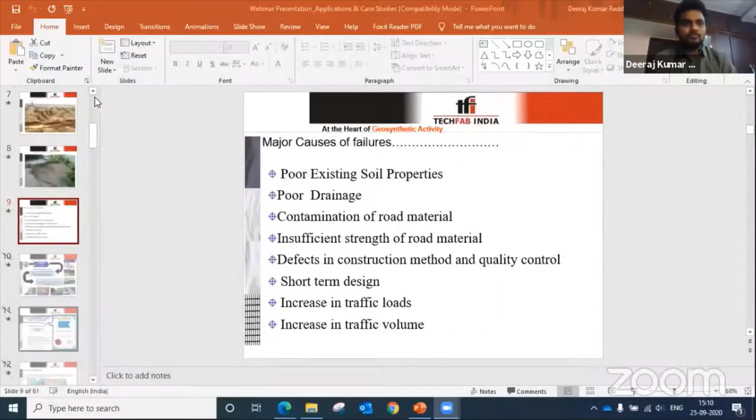Thank you for your kind words. Good evening. Go ahead. Sir, you need to enable screen sharing for me. Yeah, perfect. So you're able to see my screen, sir? Yes, yes.

Good afternoon all, myself Deeraj Kumar Reddy. I feel privileged to be one of the resource persons speaking in front of you all, being one of the alumni of Vidyanikethan Engineering College. Today the presentation I'll be speaking on is applications and case studies of geosynthetic materials in road pavements.

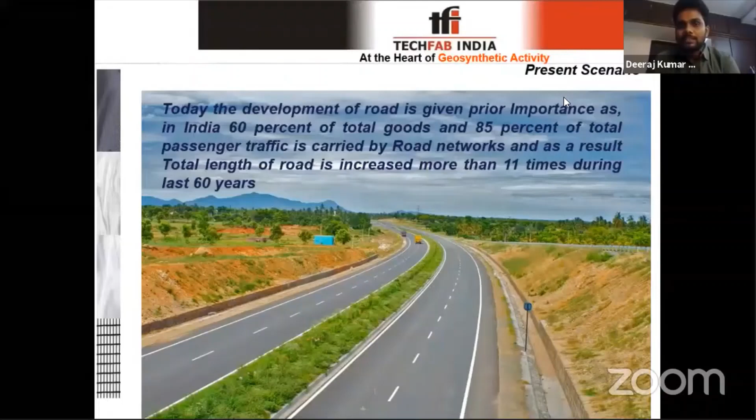As you are aware, the development of roads is given prior importance in India. In India, 60% of total goods and 85% of total passenger traffic is carried by road networks. As a result, over the last 60 years, the road network has increased by 11 times. I am very happy to present you very good roads in India, including rural roads, which have been of prime importance over the past few years.

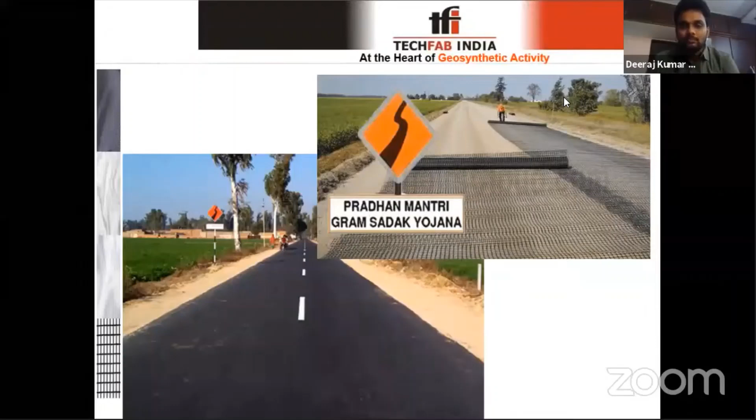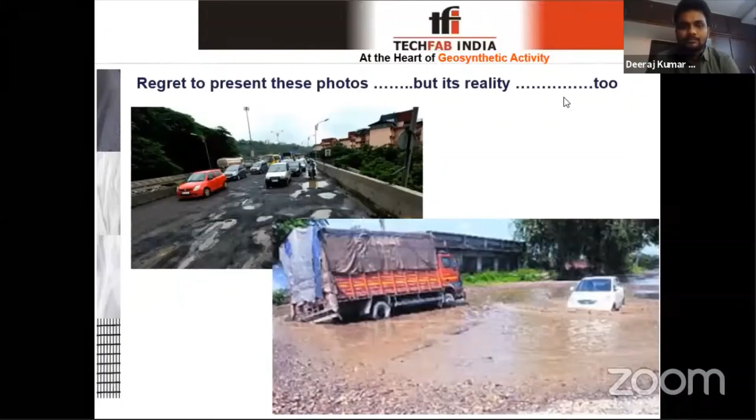But at the same time, we should accept some harsh reality where, due to various reasons, the situation of roads in India are like this - due to poor drainage systems, slope failures, or erosion failures.

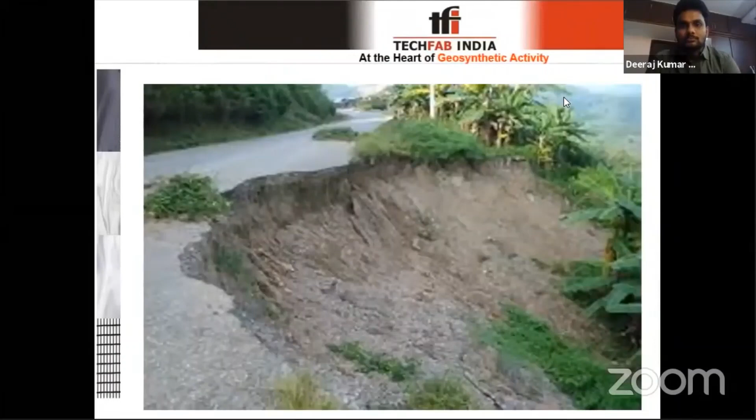When we talk about the major causes of these failures, starting from the poor existing soil properties - because we cannot eliminate the use of poor grounds from constructing the road network - and the poor drainage, that is, when we plan the construction of a road pavement, we often do not plan the drainage system, which is of prime importance, and poor drainage will cause the failure of the total structure. Then there's contamination of road material, insufficient strength of the granular materials used in road pavements - which can lead to failure - and defects in construction method and quality control.

Even if you design with 100% accuracy and perfection, if someone at the site doesn't implement what you have designed correctly, that leads to failure of your design structure.

Then there is short-term design, where there's an increase in traffic loads or traffic volume. At the design stage, you design the road pavement for 15 to 20 years. If the traffic you intended for 15 to 20 years is reached within 5 years, then it becomes a short-term design. That is also one more reason why road pavements fail.

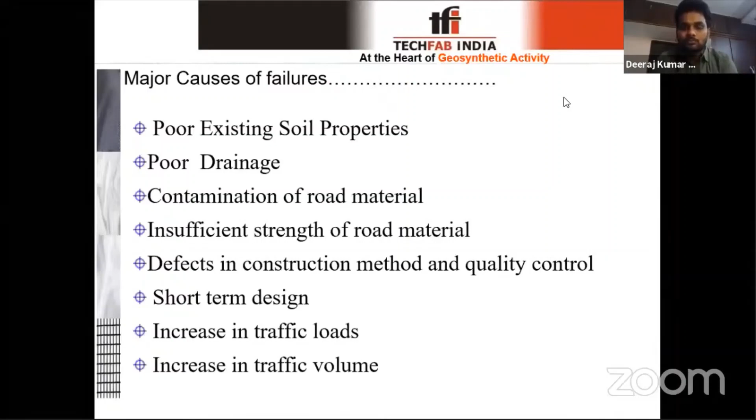So now we have discussed various causes of road failures. To address these causes, in today's presentation we will see the functions of various geosynthetic materials used in road pavements, the applications of geosynthetics in road pavements, and for each application I'll discuss the design and codal provisions, since there are certain codes and guidelines in India available for each application of geosynthetics.

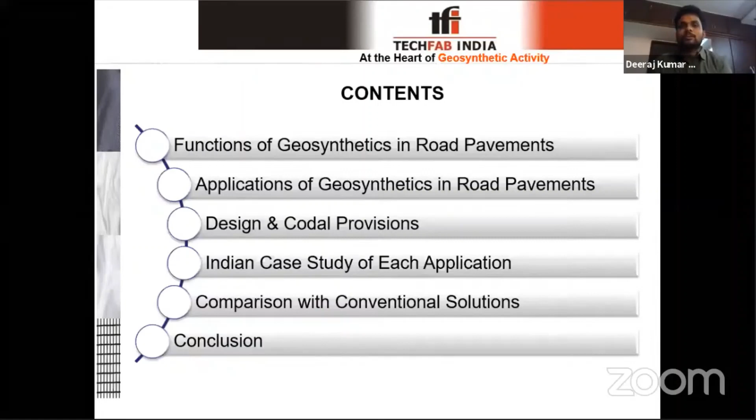Earlier this was not the case, because 5 or 6 years ago the availability of standards and guidelines in India for geosynthetic applications was very limited. But now they have emerged rapidly and usage has also grown a lot. For each application, I'll show you a case study of how it is implemented at site, and then we will compare it with conventional solutions, since geosynthetics are implemented as an alternative to conventional solutions.

Starting with the functions of geosynthetics, this is how we can avoid the failures we just discussed. First is the separation function. Then drainage, which is collecting precipitated water and discharging it to safer places. Then filtration, which means allowing water to pass through different layers while not allowing soil to pass through, preventing the mixing of two soils while allowing water to dissipate. Then reinforcement, which is generally strengthening a particular layer or material. And the barrier function, which arrests the capillary rise of water.

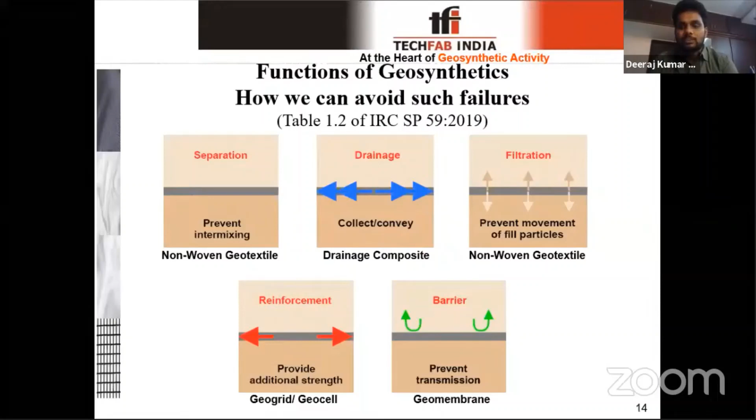With these functions, we have different applications of geosynthetics that we will see one by one. These applications are cost-effective solutions, with codal provisions, used as an alternative to conventional solutions, starting from subgrade separation and stabilization.

If you are aware of the pavement structure, there is the subgrade, which we call the existing ground. On top of the subgrade we have GSB, the granular subbase, made up of granular material. Then we have the base layer, the wet mix macadam, and then the bituminous layers - this is in case of flexible pavement. In case of rigid pavement, there is an existing ground, and on top of that a granular subbase which acts as a filter or drainage layer, and then on top of that a concrete slab. In all these layers or parts of the pavement, we have different applications of geosynthetics.

Starting from the bottom: subgrade stabilization or separation, then ground improvement for road embankments, because when a road embankment passes through very poor soil, you need to improve that ground to make it suitable for road construction. Then subsurface drainage, drainage within the pavement structures, because when rainfall happens and water infiltrates the pavement structure, it needs to be discharged to safer places. Otherwise the infiltrated water stays within the pavement structure and destroys it.

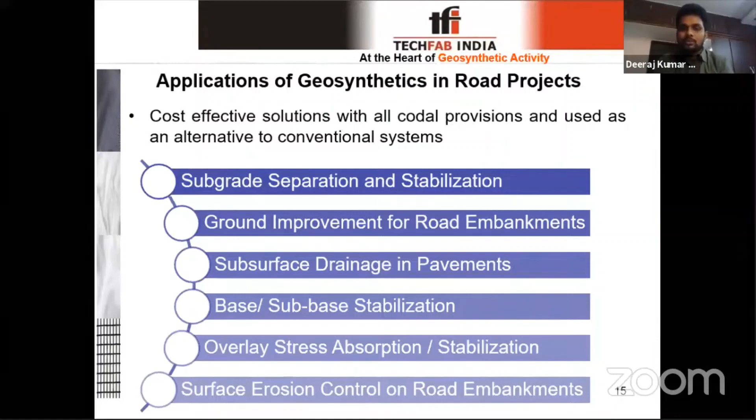Before going to the applications, I would like to focus on the standards and guidelines available for geosynthetic applications.

First, the Ministry of Road Transport and Highways specification, section 700, which exclusively deals with the specification of geosynthetics for various applications in road construction. Then there is IRC 37, the guidelines for the design of flexible pavements in India. And IRC SP 59, the guidelines for use of geosynthetics in road pavements and associated works - this code is exclusively for geosynthetics, covering design methodologies, applications, working mechanisms, installation methodologies, everything.

Then IRC SP 42, that is the guidelines for road drainage, and IRC 113, the guidelines for design and construction of geosynthetic reinforced embankments on soft subsoils. IRC 75 is the guidelines for high embankments. And IRC 34 is there, the recommendations for road construction in areas affected by waterlogging, flooding, and salt infestation.

Then IRC SP 116 is there, the guidelines for design and construction of gabion structures. My suggestion would be, if not for usage, at least for understanding the various applications, mechanisms, designs, and provisions of geosynthetics used for road construction. These guidelines are useful for both transportation engineering and geotechnical engineering prospects, and they are easier to understand than textbooks. So my suggestion would be to keep at least one copy with you, and whenever required, just go through them.

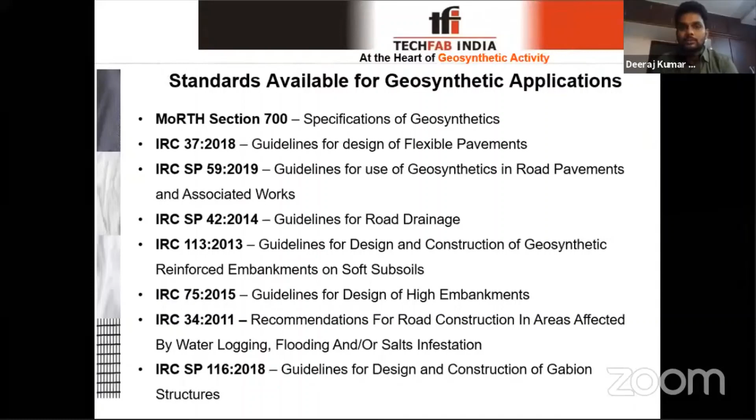Starting with the separation and filtration function. This is the application where, for example, you have a black cotton soil, and on top of it, if you intend to construct a road with good quality granular materials and other layers. Over a period of time, the good quality material on top of the black cotton soil will get mixed with these clayey particles, and it will deteriorate the strength of your good quality material also.

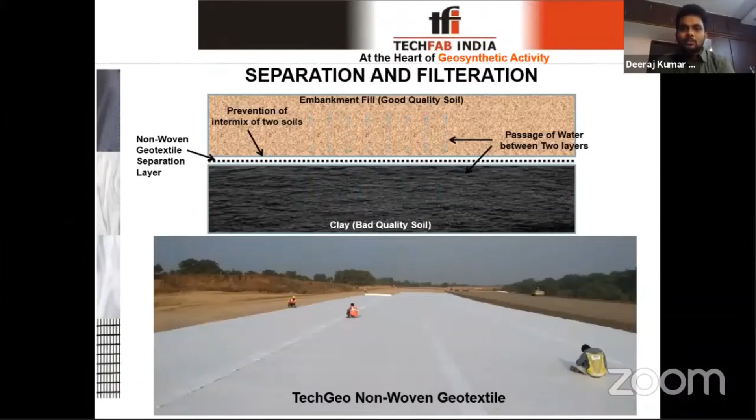So if we prevent intermixing of these two layers, each layer will function its purpose for the entire lifetime of the pavement. In order to separate these two layers, we have a non-woven geotextile which separates the two layers, and at the same time allows water to pass through, because if you arrest the water passage, it will develop pore water pressure and unnecessary problems will arise. So this geotextile will only restrict the passage of soil particles and allow the water to pass through. This is about separation and filtration.

When we talk about the non-woven geotextile application, the BIS code 16363, the Ministry of Road Transport specification, and IRC SP 59 cover the minimum requirements of geotextiles for use in road pavements as a separation or filtration layer. There are 3 conditions of installation, and based on our project situation, we can adopt what type of geotextile to use, because based on harsh, moderate, or less severe site conditions, we have different strength requirements of the geotextiles to be used.

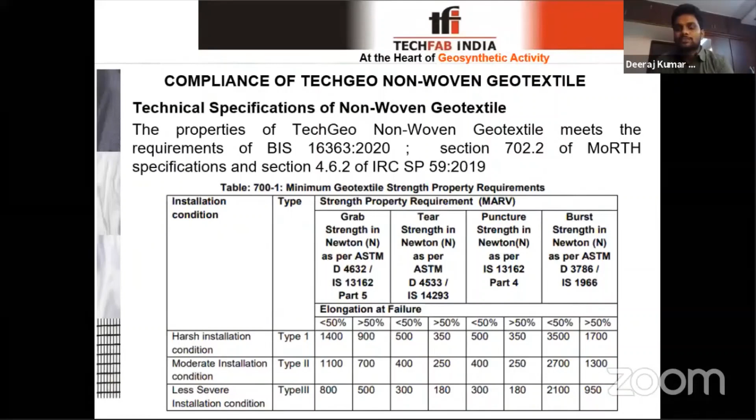Regarding the case study for the separation and filtration function, I'll show you one of the projects which is executed, or being executed, in Gujarat currently. That is the Vadodara Kim Expressway, executed by NHAI, with L&T as the contractor.

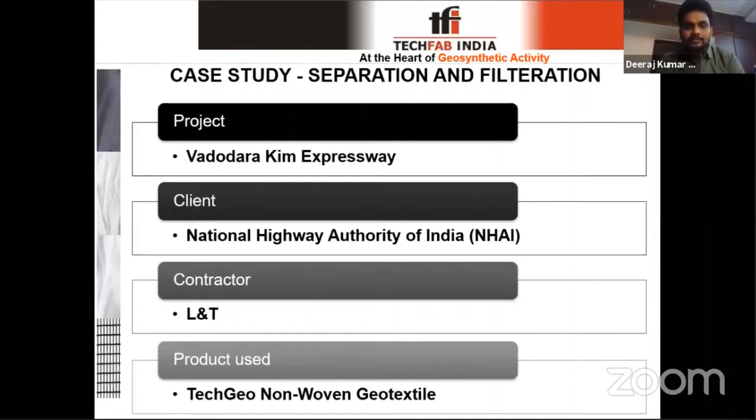The soft clay in the existing soil was the main problem here, and the possibility of intermixing with the granular layers above would deteriorate the strength of the granular layers. Hence, there was a need for a separation and filtration layer, and the non-woven geotextile, which meets the requirements of MORTH 700 specification for separation and filtration geotextile, was used in this particular project. You can see the condition of soil in the subgrade, where it is purely a black cotton soil, which is expansive and very weak in strength.

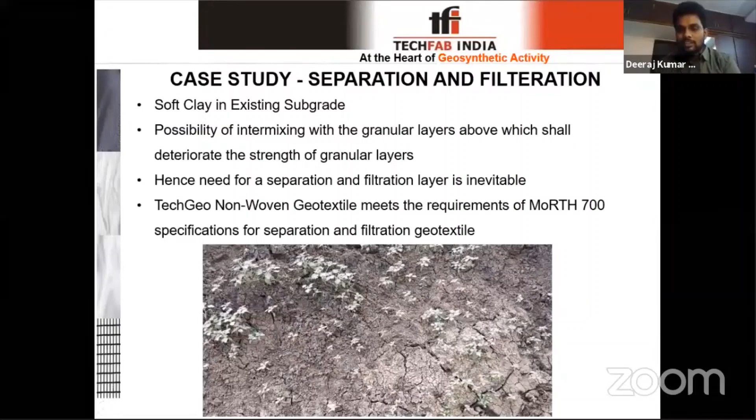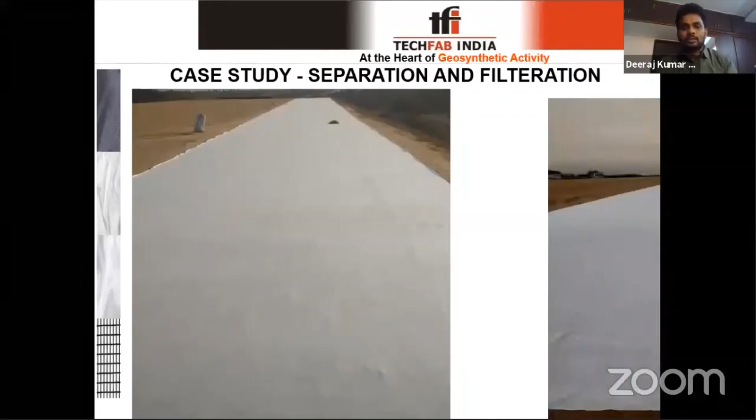So these are some of the project photographs. Basically these geotextiles come in the form of rolls, where each roll is around 5 meters wide and 100 meters long, and of course these can be customized based on requirement. These rolls are first unrolled as per our markings, and as your road pavement is wider than your geotextile, you need adjacent rolls, and these adjacent rolls need to be provided with an overlap of 100 to 150 mm.

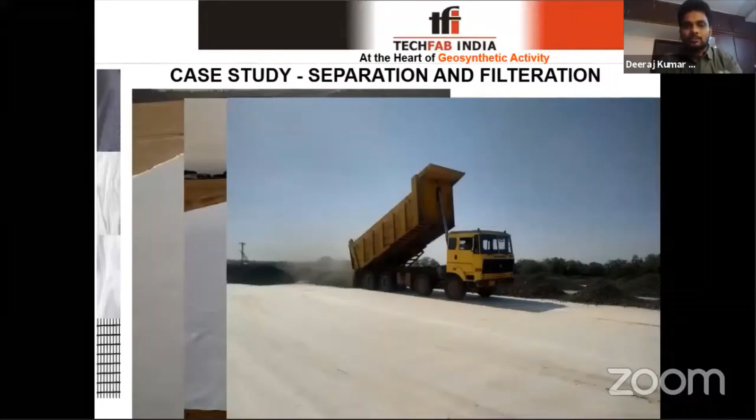Once these geotextiles are laid, the remaining granular layers like gravel, GSB, and other layers will be laid, and this geotextile will prevent the bottom soil from getting mixed with the granular material that is being laid on top of it.

So the next application is ground improvement involving geosynthetics. This ground improvement especially is required where you are constructing a road embankment, that is, making your road elevated from the existing ground.

There are various options like basal reinforcement, where you're reinforcing the bottom of the embankment with the geogrid or geocell, and subsurface drainage, where whatever infiltrated water from the top or the capillary rise of water needs to be discharged laterally using subsurface drainage, along with the separation geotextile we have seen just now. There are other applications also, like deep foundations with basal reinforcement with piles, and staged construction with PVDs and stone columns.

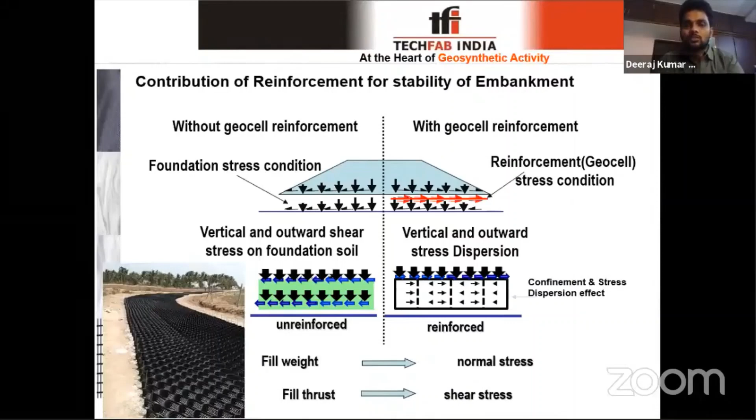Regarding the design of geosynthetic reinforced embankments, I've discussed the various codes: IRC 75, which is the guidelines for design of high embankments, and IRC 113, which is the design and construction of geosynthetic reinforced embankments. These are the guidelines. If you have at least basic fundamentals of geotechnical engineering, you can very easily understand the guidelines or standards given in these codes.

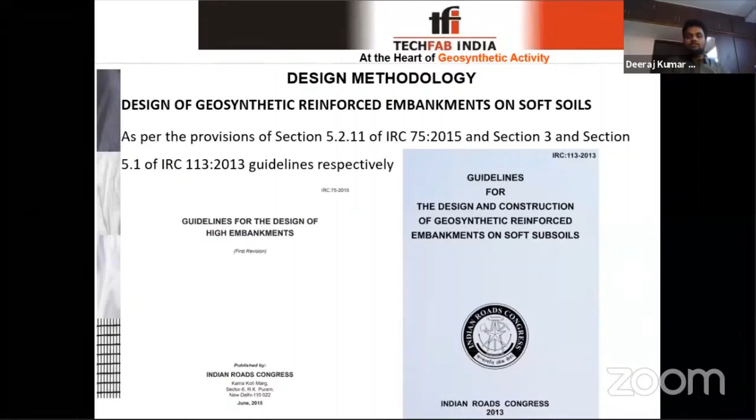Regarding the technical specification of the geocell, that is specified in the ministry's specification and IRC SP 59, which includes the density, environmental crack resistance, carbon black content, cell wall thickness, peel strength and creep rupture strength of the geocell.

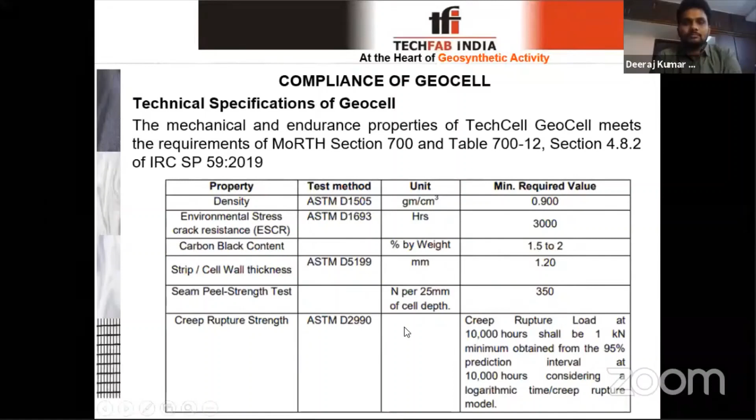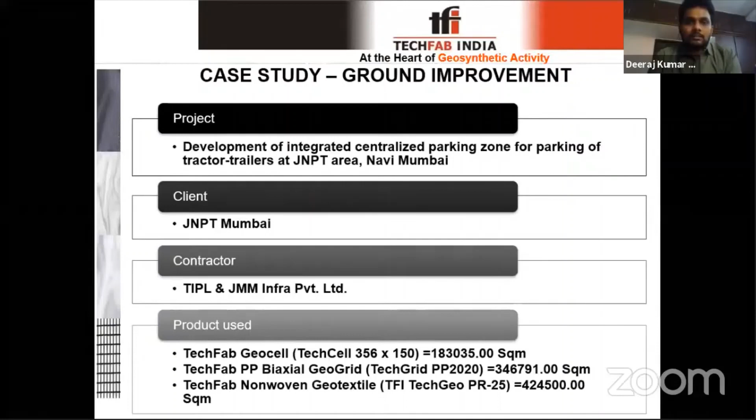Regarding projects which include the geocell, I'll discuss one project at JNPT, that is Jawaharlal Nehru Port Trust in Mumbai. The site was near shorelines, and it was complete marine clay, which was having differential settlements, and the parking lot would be subjected to very heavy loads with containers and trucks. So the very poor bearing capacity of foundation soil and the differential settlements were the major problems there. These problems made it necessary to find measures which would dissipate the loads very evenly and minimize these problems.

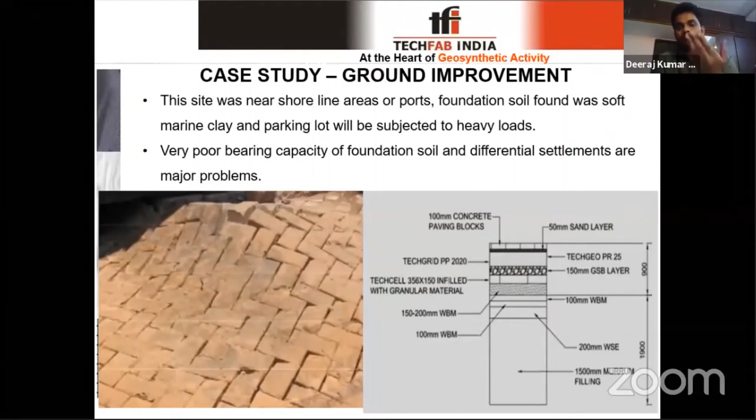As you can see in one of the photographs, the ground is sinking here. This is the problem, and loads such as containers or heavy trucks, if they come on top of this kind of ground, they absolutely sink at that point. These are some of the photographs.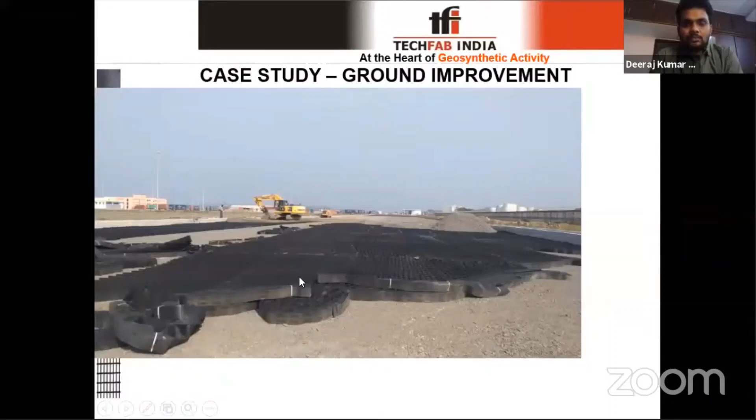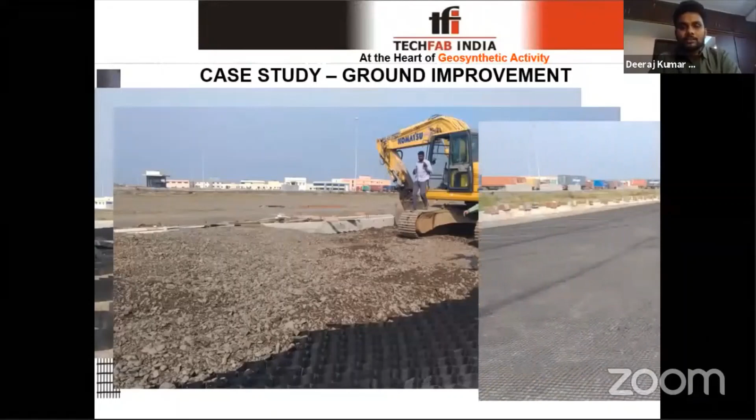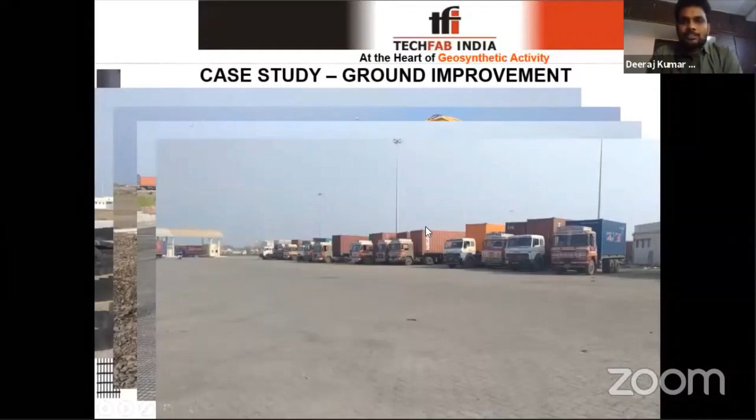These are the geocell panels which will be spread initially on the ground, and in these geocell panels, the fill material, that is the granular fill, will be spread and compacted. This is a geogrid for more even distribution of loads. And this is the finished structure of the parking lot. So this is the case study of ground improvement.

Next, we will talk about the most happening or most trending application of geosynthetics in India from the last year. That is stabilizing the base and subbase layers of the pavement. These base and subbase layers, which are the granular layers of the pavement, if we strengthen them, that will improve the modulus of that layer and thereby enhance the life of your pavement. Or if we want to keep the life of the pavement the same, we can optimize the cost of construction of the project.

If the cost of construction of a particular project is maybe 100 crores, we can optimize it by at least 10 crores, which is a huge saving for the contractor or the government. The geogrid shown in this photograph is a biaxial geogrid, having extrusions at the junctions, and the unique structure allows it to get a good grip on the aggregate particles. If you have aggregates on these apertures, they interlock with each other and you get a grip, thereby the strength effect is transferred onto the aggregates, and your layer gets strengthened.

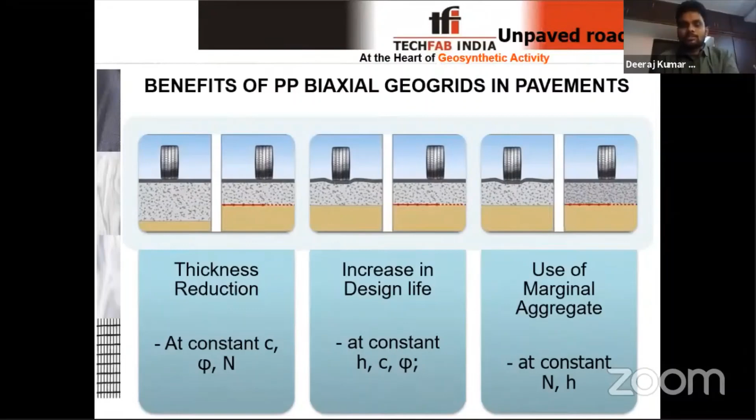Then use of marginal aggregate. Marginal aggregate does not have the required strength of the natural aggregate used in pavements. These are especially available in the east and northeastern parts of India, where adequate strength aggregate is not available. These materials can also be used in the pavement structure using reinforcement, thereby strengthening those layers.

When we talk about design methodology, IRC 37 2018 and IRC SP 59 cover the design methodology of reinforced pavement using two methods: the modulus improvement factor method and the layer coefficient ratio method. Either method can be used to improve the modulus of that layer, which means improving the strength of the pavement.

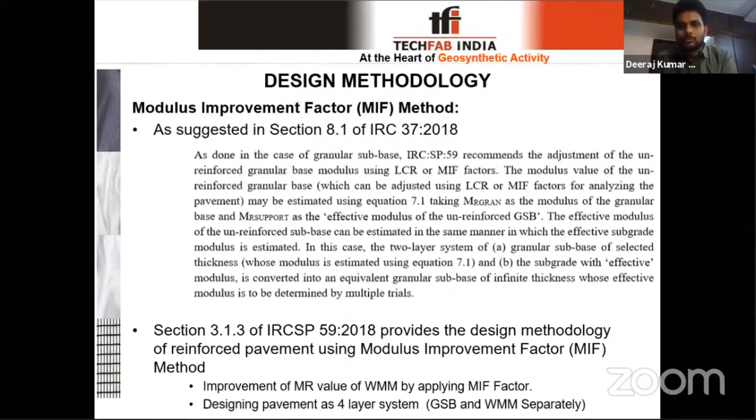This is a calculation, I'm not going into the depth of it. This is a summary where you have traffic loading of 60 million standard axles and 100 million standard axles, and your subgrade, the existing soil CBR, is 6%. I'm showing a comparison where you can see the bituminous layers and the granular layers.

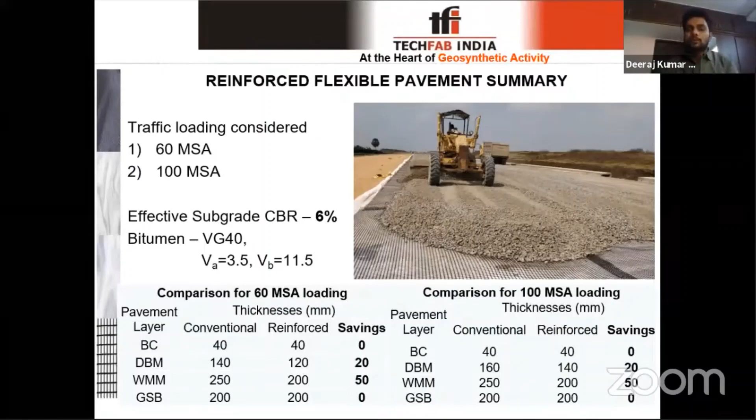You can save a certain amount of thickness, that is 20 mm and 50 mm. This means there is significant saving in the material being used, and at the same time your construction period also comes down, which results in overall reduction in the cost of the project.

When we talk about the specification, the BIS code 17371 and the ministry specification IRC SP 59 specify the same table shown here, where the stiffness of the geogrid, the strength at 2% and 5% strains, is required. The requirement is to achieve maximum strength at very minimal strains.

And then the junction efficiency - as I was saying, the most unique part is the junction of this geogrid. The junction efficiency is also one of the main factors. And the ultraviolet stability, this is for the durability of the geogrid.

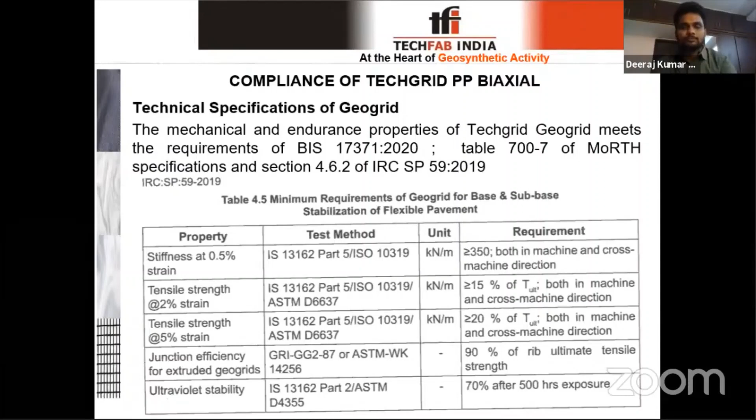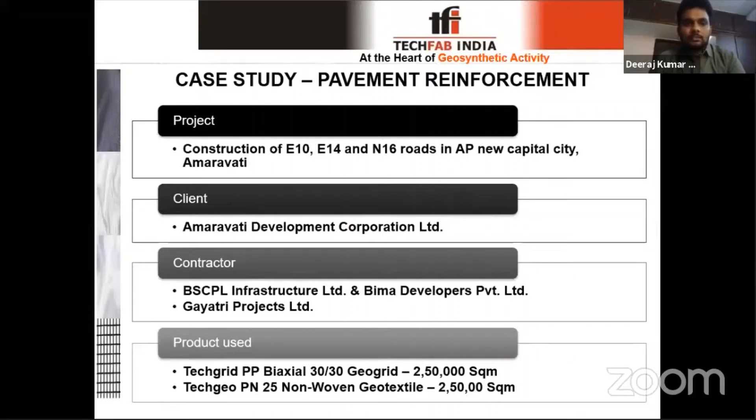For a project regarding geogrid application, I'm going to show you one road project that has already been implemented in Amaravati, Andhra Pradesh, executed by BSCPL and Gayatri Projects.

The project site was mostly clay, and the swelling pressure was the most important thing, ranging up to 200%. You can imagine what kind of pressure that can exert on the structure. In semi-arid climatic conditions with short wet and dry cycles, the aggregate or soil swelling pressure and shrinkage problems will happen.

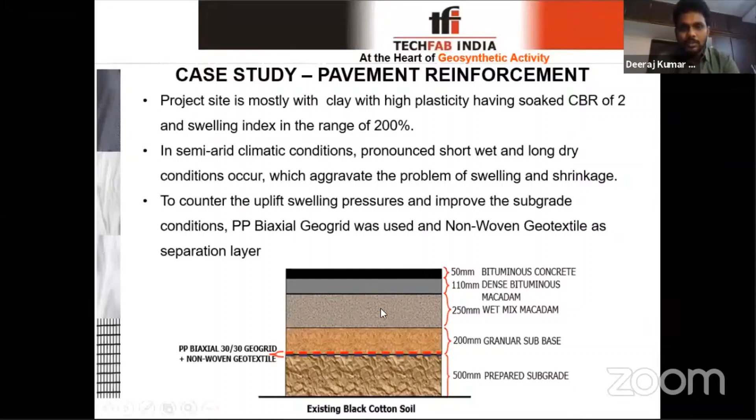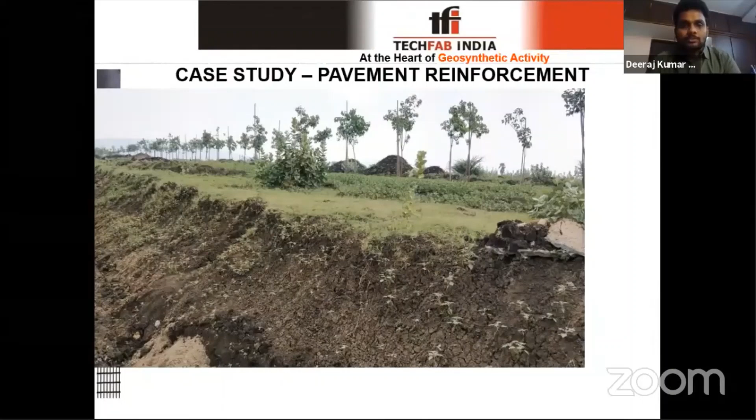These are some of the project photographs. You can see this is completely an agricultural field where the road is passing through - complete black cotton soil. The soil was excavated and the surface was formed as per the level requirements.

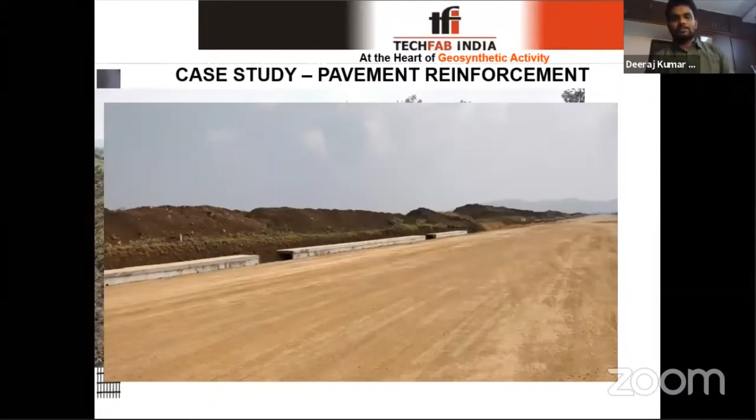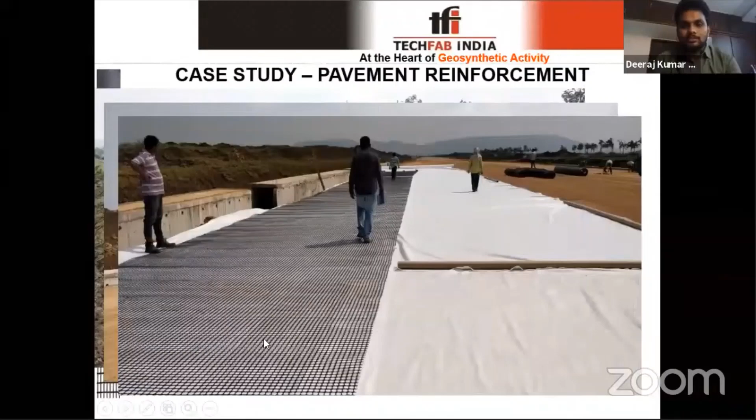On this formed surface, this white colored one is a non-woven geotextile, and this is a geogrid. First the geotextile is laid, and then the geogrid. The adjacent rolls are overlapped, and using dumpers, the GSB material - granular subbase material aggregate - was dumped, then spread and compacted.

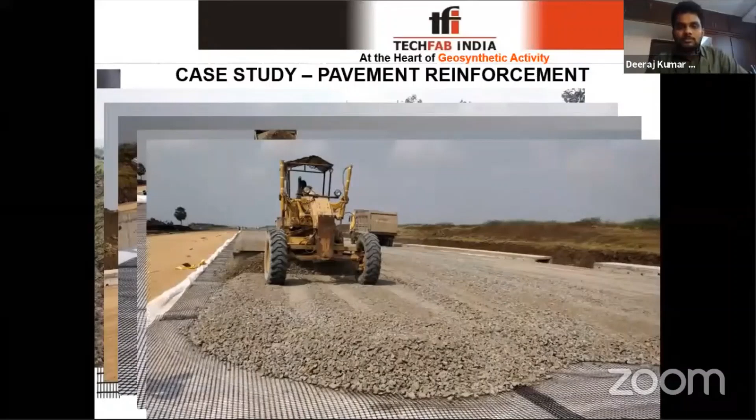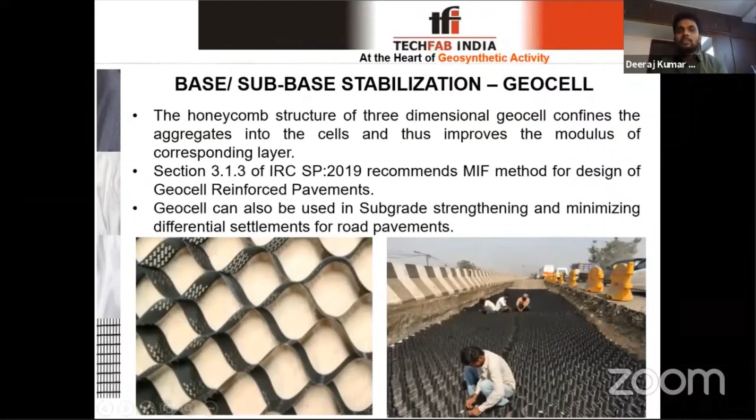So this is about the base and subbase stabilization. One more point: as per Indian Roads Congress guidelines, the geocell can also be used for base and subbase stabilization. This is the geocell material, a honeycomb structure which is three-dimensional in nature, and it can also be used in subgrade strengthening and minimizing differential settlements for road pavement.

Next is the subsurface drainage. This is something like you have a road pavement on top of the ground, and when rainfall happens, water infiltrates into the pavement structure. That water needs to be dissipated away from the pavement. So this is a collect and convey mechanism, where you have a drainage composite with two sides of geotextiles and a core in between. When water passes through the pavement structure, it is collected into the drainage core, and this core transmits and discharges the water outside. So this is the subsurface drainage.

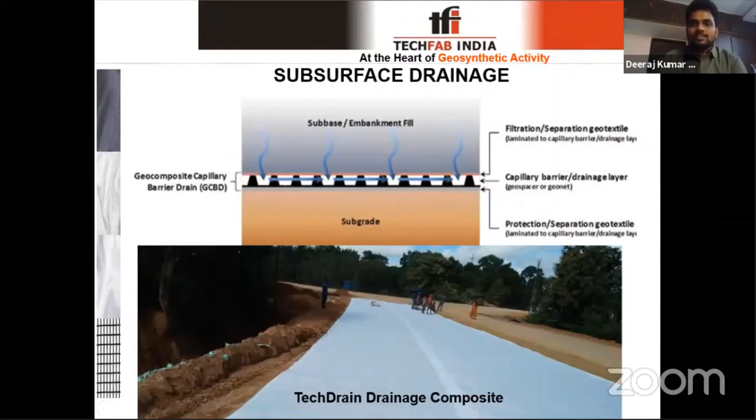Regarding the codal provisions for drainage composite, first is IRC 37, the guidelines for design of flexible pavements. It gives the provision of using drainage composite in case of CTSB road pavements. CTSB is cement treated subbase, where you strengthen the base and subbase layers using cementitious materials. When that strengthening happens, the granular layers lose their drainage characteristics. So to compensate that loss, IRC 37 specifies using drainage composite as a compensating material.

Next is IRC SP 42, the guidelines for road drainage. This is applicable for both rigid and flexible pavement, especially in rigid pavement, where the granular subbase or aggregate material only serves the purpose of drainage and not structural importance. There, your granular material can be replaced with the drainage composite.

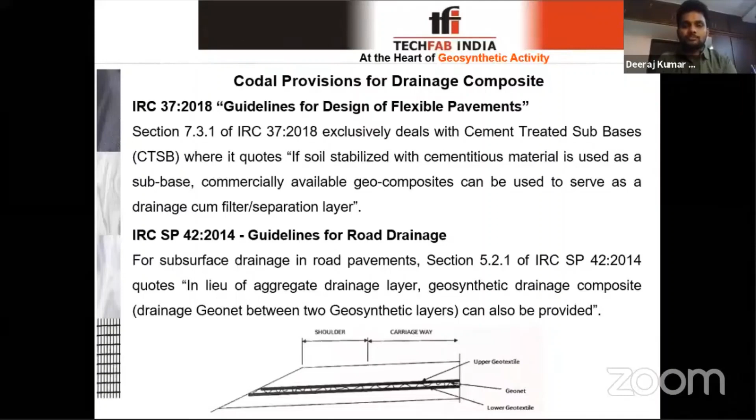Now, for road drainage, there is one more application in IRC SP 42, the arresting of capillary rise. If you have a drainage composite at a particular level above which you do not want water to enter the road embankment, you can place a drainage composite which will collect the water coming from the bottom and discharge it away from the embankment.

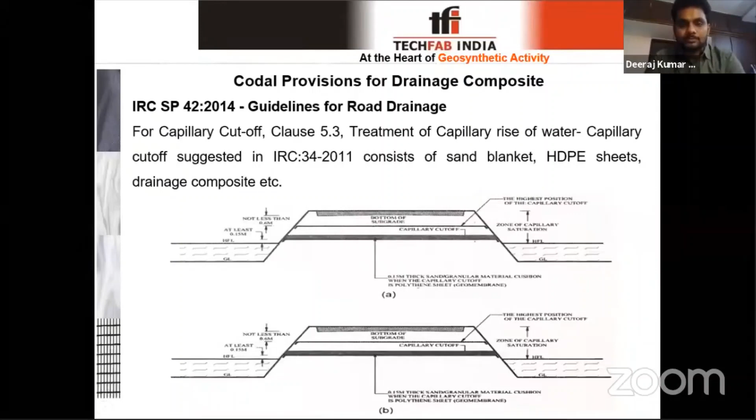These are the recommendations for road construction in areas affected by waterlogging or flooding, where if you have a cutting for road construction, side drains or French drains will be constructed at the edge. IRC 34 recommends the use of drainage composite for the edge drains or fin drains also.

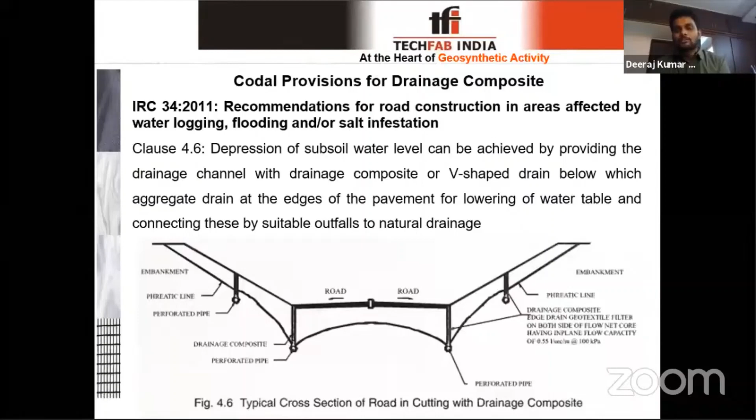When we talk about the technical properties or specifications of drainage composite, we have strength, puncture resistance, and hydraulic properties. That is, at a pressure of 100 kPa or 200 kPa, the in-plane permeability of the drainage composite should satisfy certain limits, as per MORTH or IRC 34.

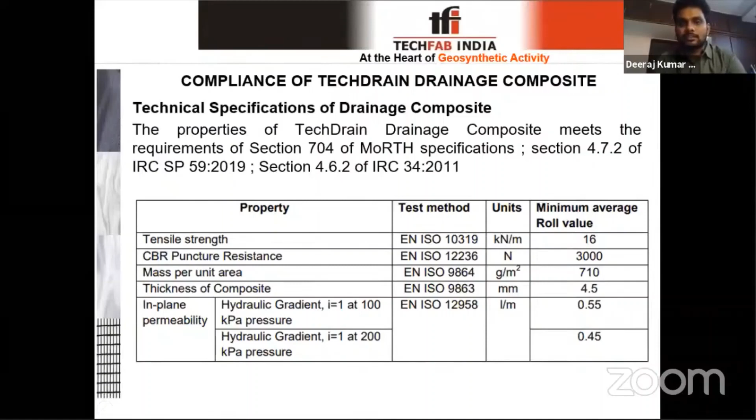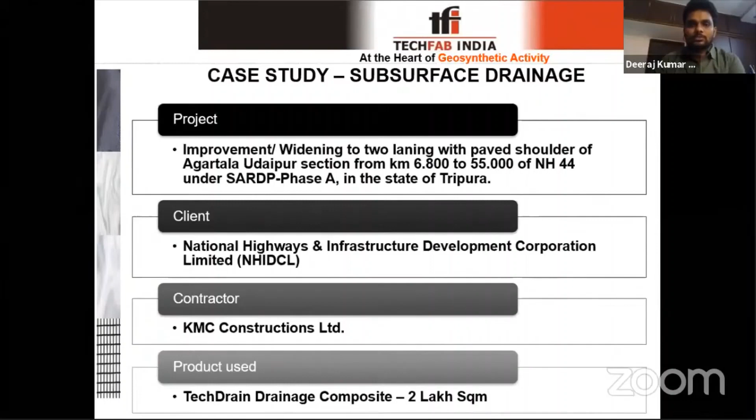This is one of the projects, the improvement and widening of two laning with paved shoulders in Agartala, in the state of Tripura. This was executed by NHIDCL, the National Highway and Infrastructure Development Corporation, and KMC Constructions was the contractor. Basically, the state of Tripura, in Agartala, is a very heavy rainfall area.

So the subsurface drainage was of utmost importance. For your information, the availability of aggregate for construction of conventional GSB material was very scarce. They used to procure it from somewhere around 100 or 150 kilometers or more. Under such conditions, soil cement stabilized subbase was adopted by the contractor. Then CRRI, the Central Road Research Institute, recommended the use of drainage composite since they were using the soil and cement stabilized subbase, in order to compensate for the drainage. So CRRI recommended the use of drainage composite at the subbase.

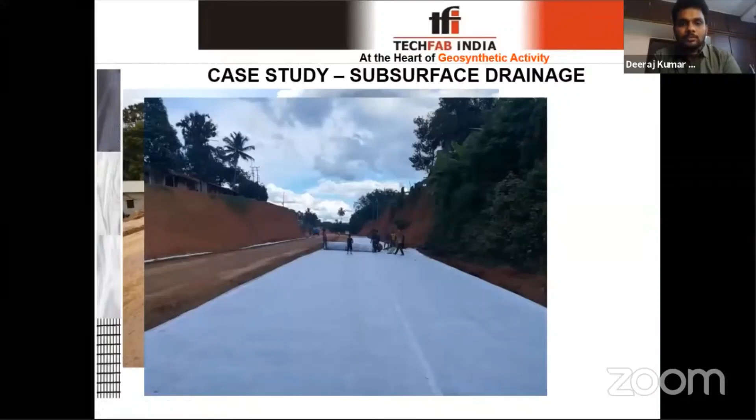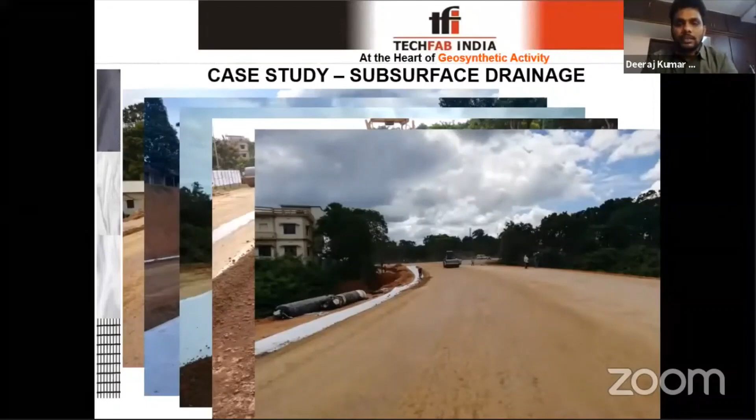So these are some of the photographs. This is the preparation of surface. Once the surface is prepared, rolls of drainage composite are unrolled, and the adjacent rolls, as mentioned earlier, are maintained with overlap. Once these rolls are unrolled, fill material is dumped, spread, and then compacted. This is the application of subsurface drainage using geosynthetic material.

Now the overlay stabilization, that is stabilizing your bituminous layers or asphalt layers. Generally, at regular intervals, after every 5 years or 10 years, they do an overlay on the existing road, as there might already be the presence of cracks which require the overlay.

Due to that, they again do black topping for about 40 to 50 mm, and it looks like a new road. But there will already be cracks present on the old pavement layer. So if we lay the new layer on top of the cracked surface, over a period of time, maybe after 3 or 4 years, these cracks propagate from the old layer to the new layer. We call this bottom-up cracking. This will again damage the new overlay.

To prevent that, if we lay an interlayer before laying the new layer, it will arrest the old cracks at that particular position and prevent the propagation of cracks to the new layer. This will enhance the life of your overlay, that is, whatever black topping we are doing will enhance the life of the pavement. In effect, this will minimize the maintenance cost.

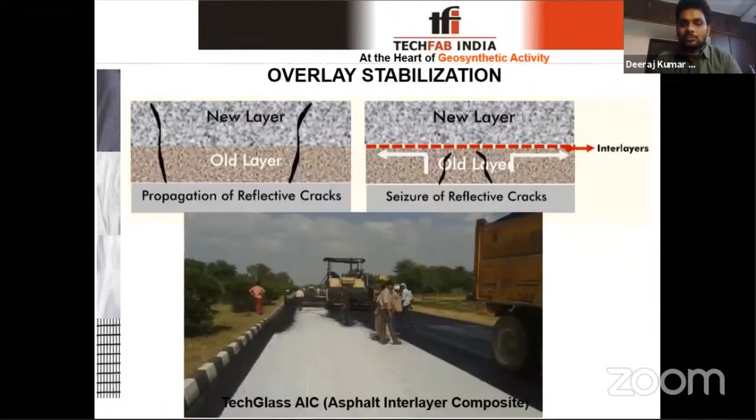For asphalt reinforcement, the IRC SP 59 guidelines for use of geosynthetics gives the detailed specification and mechanism of how it works.

The asphalt reinforcement reduces reflective cracking, which is the bottom-up cracking I mentioned earlier, and improves moisture retention by impregnating with bitumen in the tack coat. Generally, the paving fabric, paving grids, and asphalt interlayer composites are all glass fiber materials.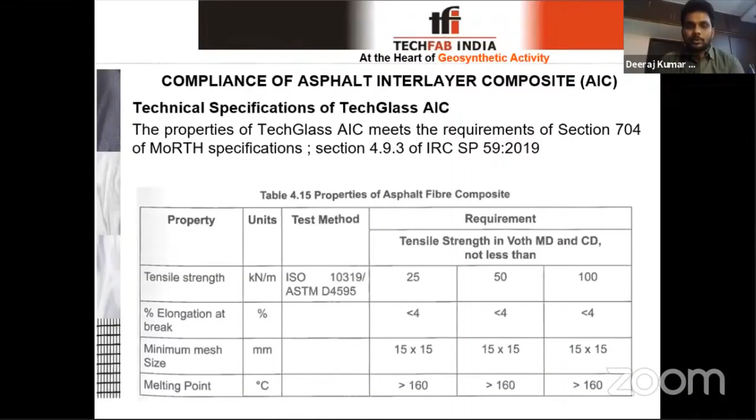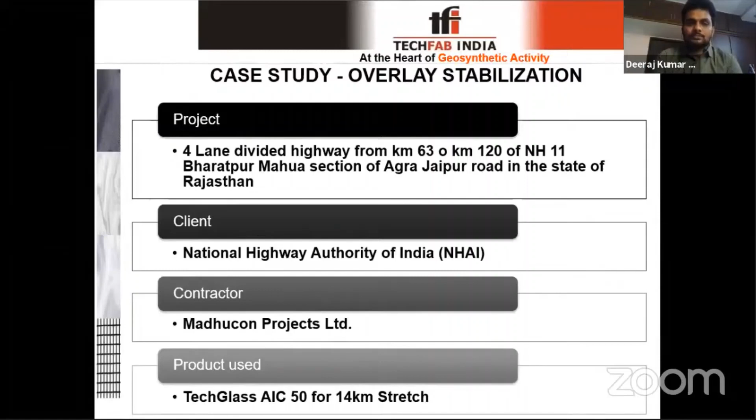Regarding overlay stabilization, this is a project in the state of Rajasthan, a road project between Bharatpur and Mahua, executed by NHAI with Madhucon Projects as the contractor. This was the road condition before the maintenance works, where crack widths were more than 5 mm.

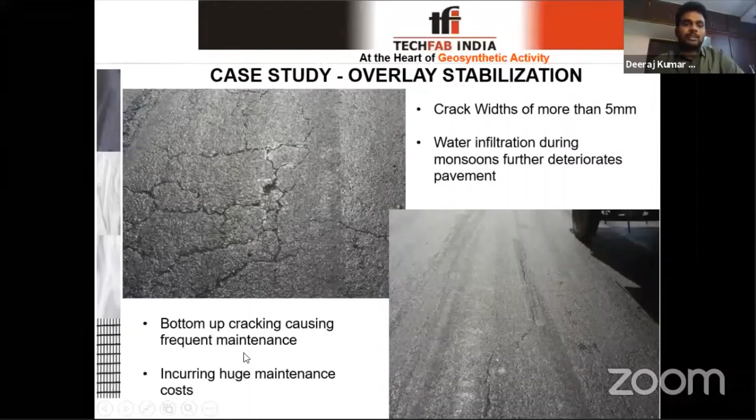Water infiltration during the monsoon into these cracks will further deteriorate the pavement structure. And if the contractor lays blacktopping on top of it again, the bottom-up cracking will cause frequent maintenance, which increases maintenance costs.

To overcome that, they introduced an interlayer using an asphalt interlayer composite, a glass fiber composite, on top of the existing road.

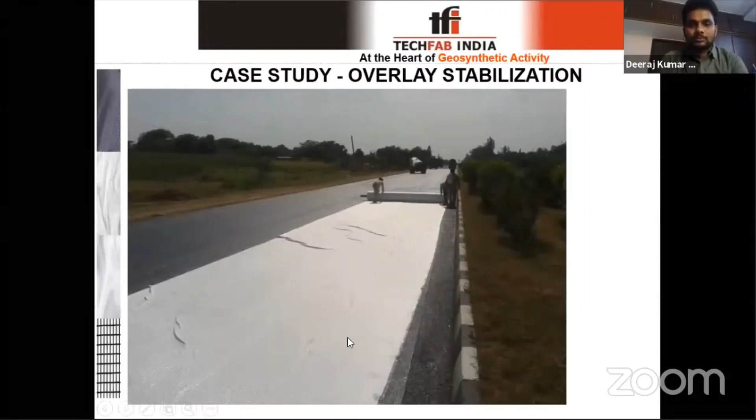If you can see here the cracks, this is the existing road and this is the glass fiber composite laid on the existing road. Once this roll is unrolled, the tack coat is applied and the bituminous topping is laid.

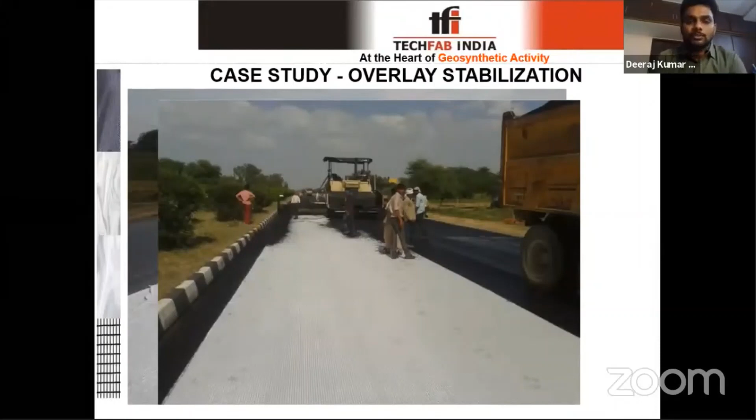This is the compaction, and this is the finished road with the interlayer material. This will increase the life of your blacktopping or overlay.

The next application is slope erosion control. Often you might have seen road embankments where the slopes are getting eroded over time due to rainfall or surface water flow. To prevent erosion of road embankments, conventionally there are materials like stone pitching.

They do 300 mm thick, that is 0.3 meter thick stone pitching, or concreting. As an alternative, there is a geocell of lower thickness, that is 75 mm or 100 mm thick. In the geocell, you can either fill vegetative soil.

If you fill the vegetative soil and do regular watering, vegetation will come on the geocell or slope surface. And if there are conditions where growth of vegetation is very difficult due to climatic conditions, or you do not want regular watering, then concrete or gravel fill in the geocell will serve the purpose.

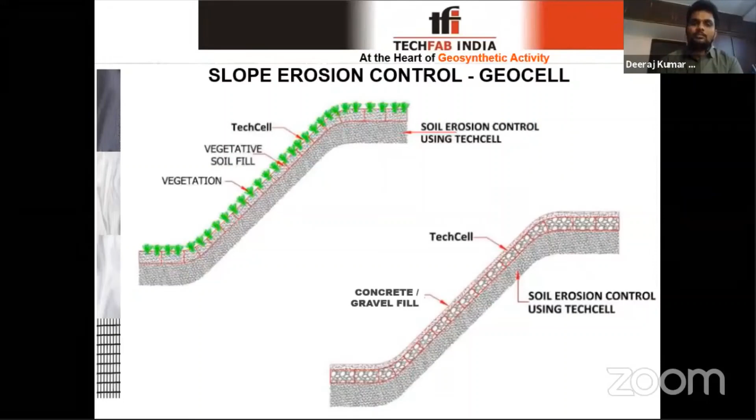The specification of the geocell will remain the same as the earlier application, except the thickness of the geocell.

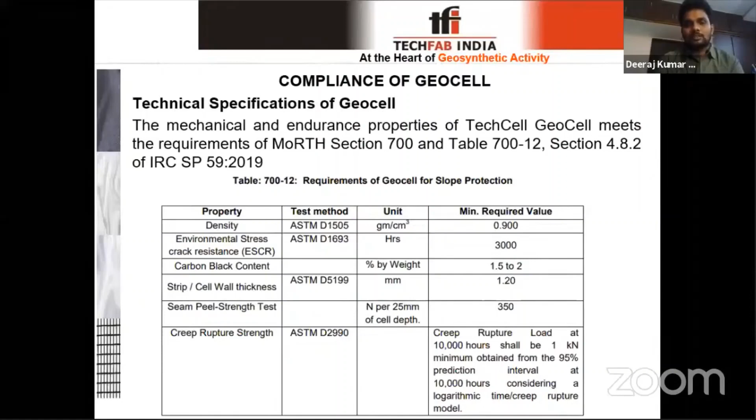Next is the case study for slope erosion control: the erosion protection work for a landfill embankment in the region of Kutch in Gujarat, executed by the Central Pollution Control Board, with Saurashtra Enviro Projects as the contractor.

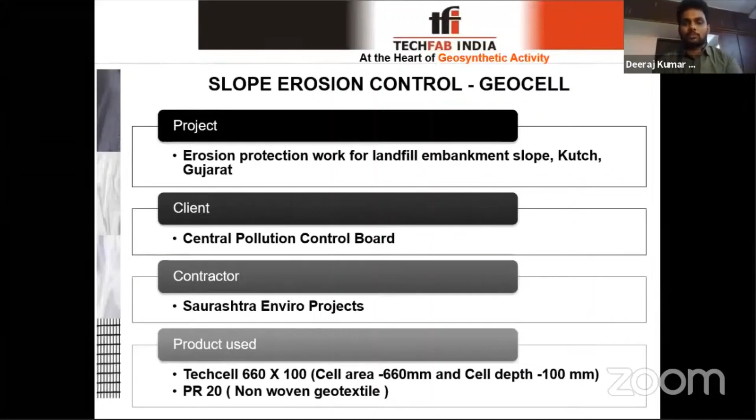The landfill surface got damaged during the first monsoon itself, post-construction, which left the embankment slope with many rain cuts, rills, or gullies. Due to these heavy rains and continuous impact, these cuts or gullies became very deep.

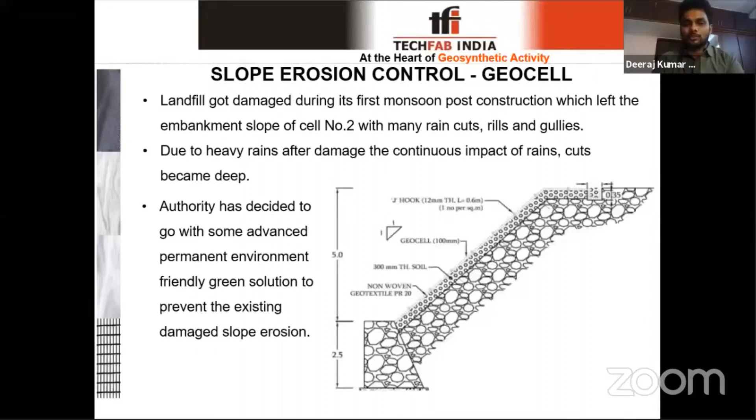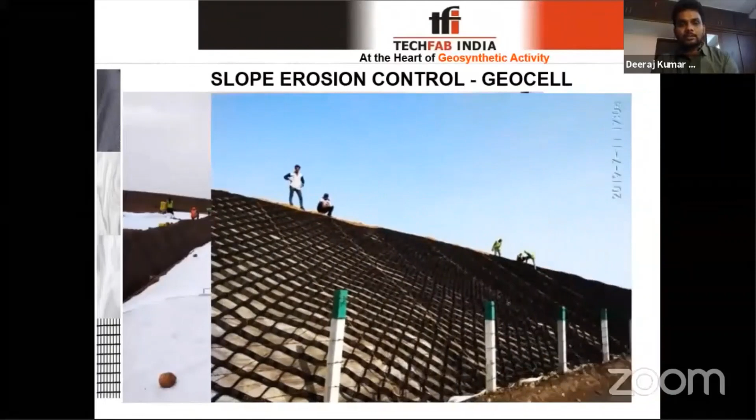The authority decided to go with an advanced and permanent environmental friendly solution to prevent the existing damaged slopes from eroding. This surface was first covered with geotextile to prevent migration of fine particles, and then the geocell was laid.

In the geocell the soil was filled, and in this soil itself there were some seeds mixed in before the soil was filled. So due to those seeds, when you do the watering, vegetation automatically comes.

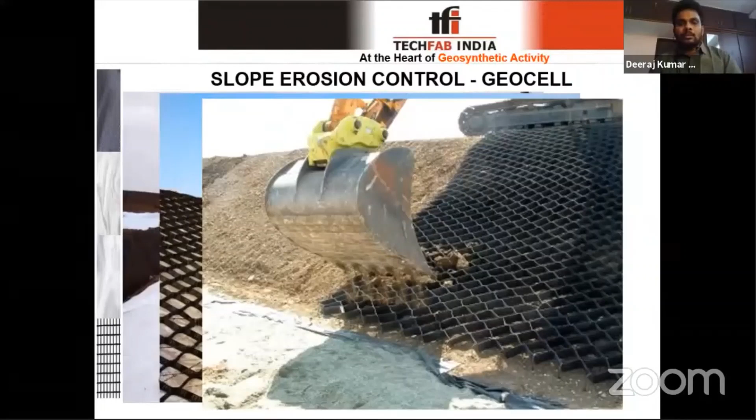Apart from this, I was talking about the other alternative also, that is concrete filling. Here you can see this is PCC, that is plain cement concrete, being filled in the geocell.

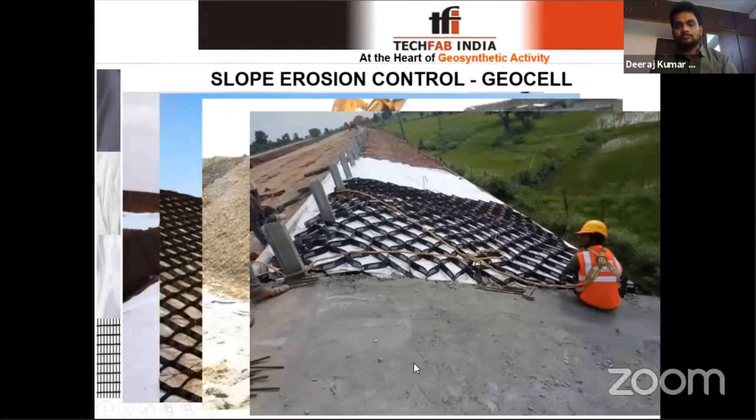So now to conclude, I would just like to revise the applications that we have seen, starting from separation and filtration, where we use a non-woven geotextile in place of a conventional well-graded sand layer. Then there's the geocell or geogrid for ground improvement, where conventionally people use soil replacement, gravel filling, or chemical stabilization.

Then there is the drainage composite, used for subsurface drainage in place of a well-graded aggregate layer, and geogrid reinforced flexible pavement in place of conventional flexible pavement. For overlays, where you have frequent overlays, to minimize that there is asphalt interlayer composite. And lastly, we've seen surface erosion control using geocell, in place of concrete lining or stone pitching.

So if you observe all the applications, we are using geosynthetic materials in soil stabilization or strengthening layers in order to save natural resources, which are becoming very scarce now. By achieving that reduction in using natural resources, you are not only reducing the cost of the project, but also making the project happen very quickly.